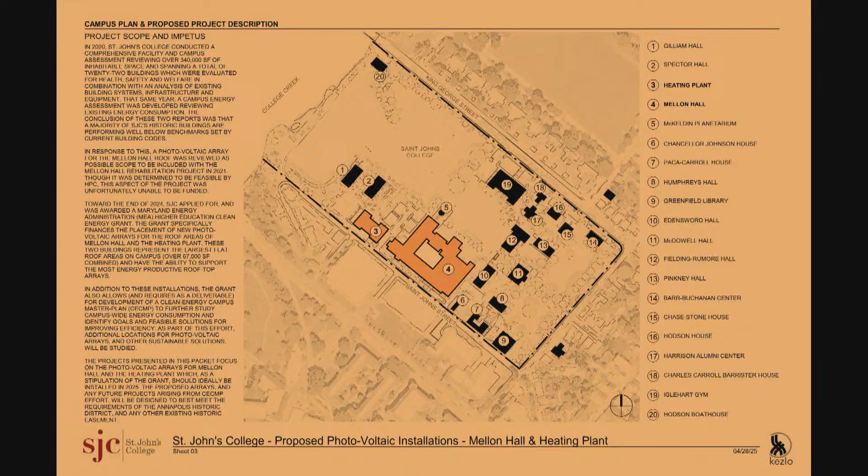Can you clarify what you meant by benchmarks? I guess it's... not as energy efficient as it should be. If you look at the requirements for buildings in new construction, there are certain energy benchmarks listed in various codes, from the IBC to the IECC. Being an existing, historic building, oftentimes those buildings fall short of those benchmarks—by nature they don't have the building envelope systems we have today.

That said, a lot of the codes allow for exceptions or have separate rules for existing buildings. Even though those are allowed to exist as they are, St. John's wanted to find ways to improve their energy impact. So what's proposed improves but doesn't meet those higher standards. So what you're presenting improves the performance but doesn't meet the current new standard. That's correct, we're trying to improve our standards.

We're trying to look at the amount of energy St. John's is using campus-wide, and find ways—part of the grant is—can we supplement what would normally be fossil fuel generated energy with something of a clean energy nature. I just wanted to be sure we understood exactly what you were referring to, but thank you.

These two buildings are within the historic district of Annapolis, but they also fall under the purview of the Maryland Historical Trust. Both buildings are on Maryland's inventory of historic properties. However, only Mellon Hall currently has a historic trust preservation easement on it, due to various projects over the years, including the rehabilitation project where state funding was sought, establishing an easement. What that means for this project is that while the heating plant and Mellon Hall are both being reviewed by the Historic Preservation Commission, only Mellon Hall also needs to seek approval through the Maryland Historical Trust's easement committee.

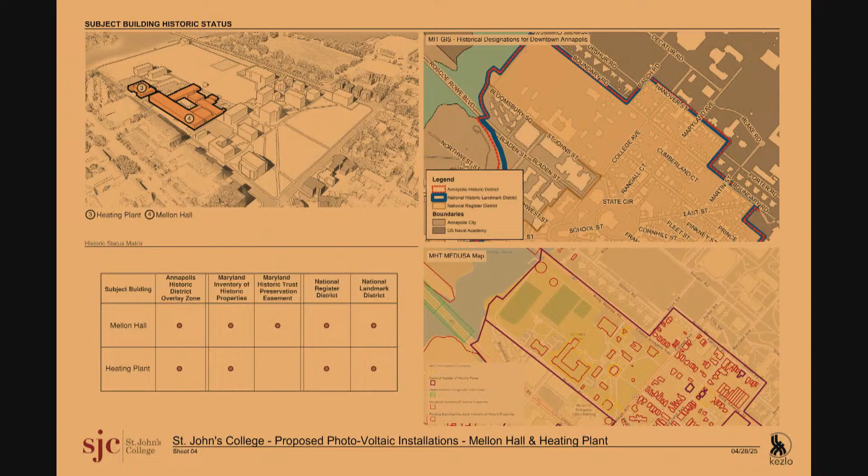Have they granted that approval? Yes, I'm happy to report we presented this back in beginning of May, and at the end of May received a letter from the director stating the project appears to be in compliance with the Secretary of Interior standards, and that the request to change or modify the easement has been approved. Okay.

These next couple of sheets again kind of summarize the various standards and guidelines that each organization utilized when reviewing regulations surrounding historic properties. They're slightly different documents, however most of them have very similar language, and indeed you'll see a lot of repeat language in here.

Would you like me to go through these? We kind of reviewed them pretty extensively during the last meeting. Have you read the staff report? Yes. Have all the commissioners read the staff report? I don't think it's necessary for you to do that. Okay, sounds good.

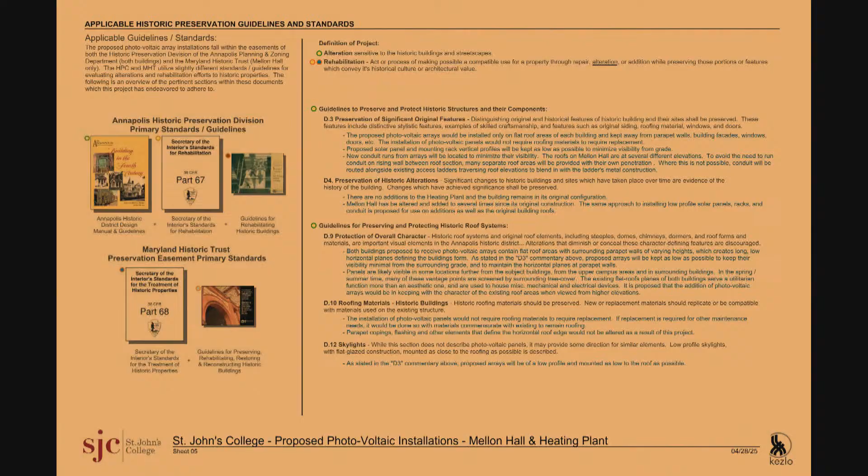Again, the brief histories of the buildings, just to touch on these again: Mellon Hall was originally constructed in the late 1950s and designed by the famous modernist architect Richard Neutra, primarily known for his work on the West Coast. I believe Mellon Hall is one of his last remaining examples of architecture on the East Coast, consisting of, if you look at that exploded view in the middle, the area in brown tan color, the FSK lobby, the conversation room, the auditorium space, back of stage areas, a two-story addition along St. John Street that's the academic wing, and then the other academic wing that projects into the campus.

Then in the late 1980s, the building was added onto by the designs of Weller, Fishback, and Bock, shown in the green portion of the exploded view. They enclosed the courtyard space and created space for administrative functions, as well as the Mitchell Gallery that projects out in front of the building.

The last additions occurred in 2001, designed by the firm Ziger/Snead, shown in blue. It consisted of the addition on the northwest along St. John Street, sometimes referred to as the conference room addition, as well as an infill of the canopy space in the courtyard to create what's now called the Fishbowl Cafe by St. John's.

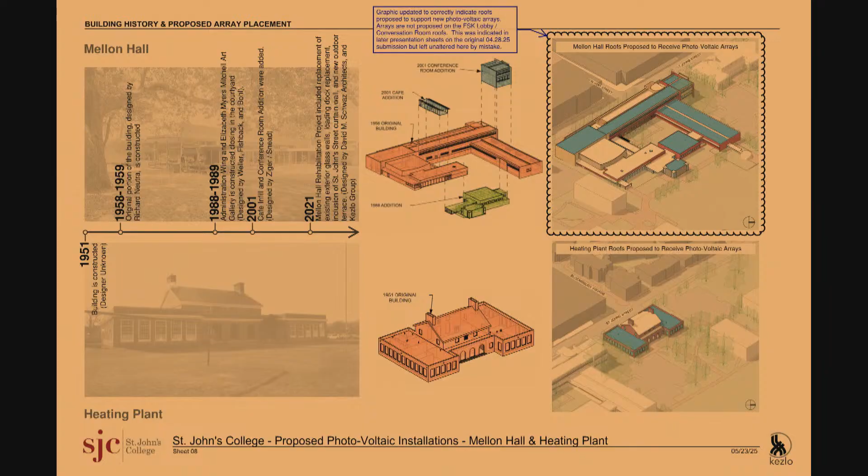Again, these are the array systems we had considered. The system on the left is the one we are proposing and requesting to be used. It is a ballasted system where the arrays are placed on racks which are weighed down to the roof with ballast blocks. This avoids the need to create penetrations through the roof for direct attachment to the structure, which introduces many opportunities for leaks to occur.

The system on the right is what we've been calling the flat panel system. You can see in the image on the left, in that gray box, all those standoffs are penetration points. You can imagine there'd be hundreds of penetrations to the roof, which introduce opportunities for leaking. Much of the roof on Mellon Hall is made out of a gypsum material, so any kind of moisture getting through that membrane becomes detrimental to the roof.

So we are proposing the system to the left. The other advantage of that system, beyond the fact that it's sloped and has better orientation to the sun for energy production, is that it allows water to drain off the panels, preventing the buildup of dust and debris, which can cause deterioration and reduce the effectiveness of the panels.

But also consider the profile height here. On the left, we notice that the maximum height of the panel is about 9 and a quarter inches. Whereas on the right, the flat panel system, due to the flashing requirement around those penetrations, ends up pushing it up to about 11 and a half inches.

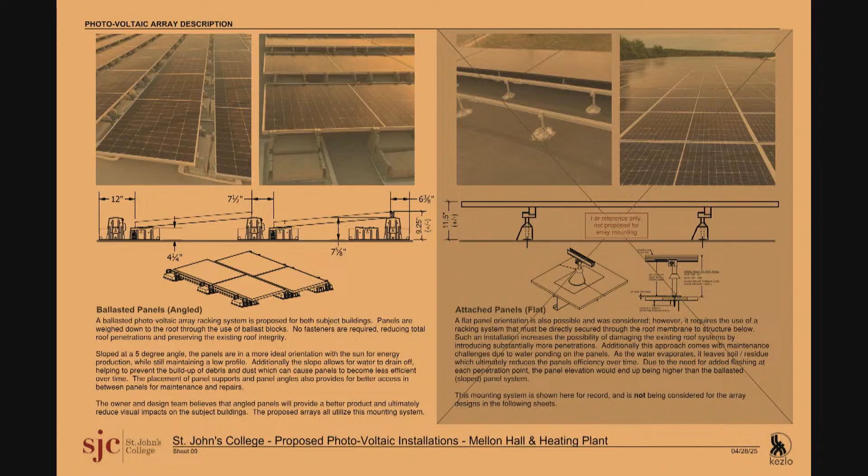This sheet covered basically all the components that were involved in the total photovoltaic system.

One thing worth noting here is that through our review of the system design and engineering, we were able to move items 4 and 5, which were originally noted as possibly needing to be outside if we couldn't find a suitable interior place. We're happy to report that those are now both going to be interior to the building.

So the only elements that will be exterior include the panels on the roof, the interconnecting conduit, the roof penetrations, and item 6, the non-fused panel, which acts as an emergency shutoff and by code is required to be on the exterior.

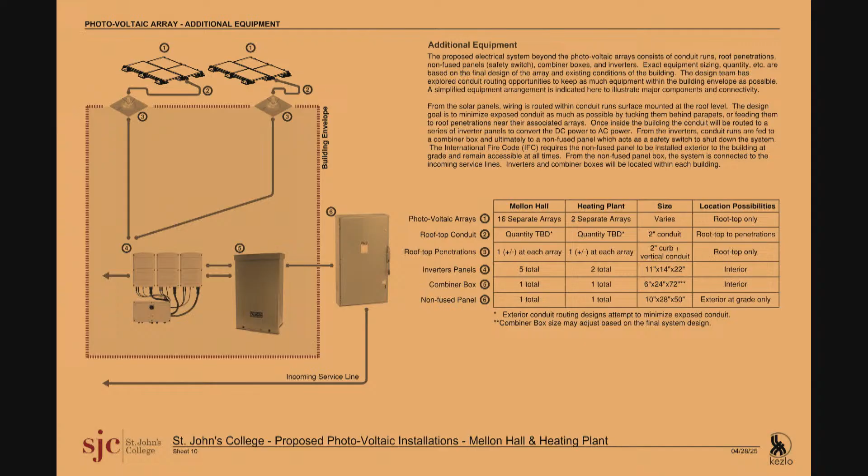This is our updated array for Mellon Hall, and I just want to give a couple of facts and figures here.

Right now we're proposing 16 separate arrays equaling about 396 panels. Annually, that's calculated to produce on average about 236 kilowatts, which is about 260,000 kilowatt hours. That's the equivalent of about 410,000 pounds of CO2 avoided through the generation of that energy, and is enough to power about 24 single-family homes per year.

It's good to know, though it's not something that can affect our decision. Just some interesting facts to put out there.

As you can see, we've taken these panels off of the roof of the lobby space and the conversation room. Again, as we're trying to respect that Neutra design, we're keeping these arrays in regular patterns, monolithically installed on the roof to the best of our ability. There's some working around existing penetrations and equipment that occurs here, but we think we've captured those monolithic arrangements to the best of our ability.

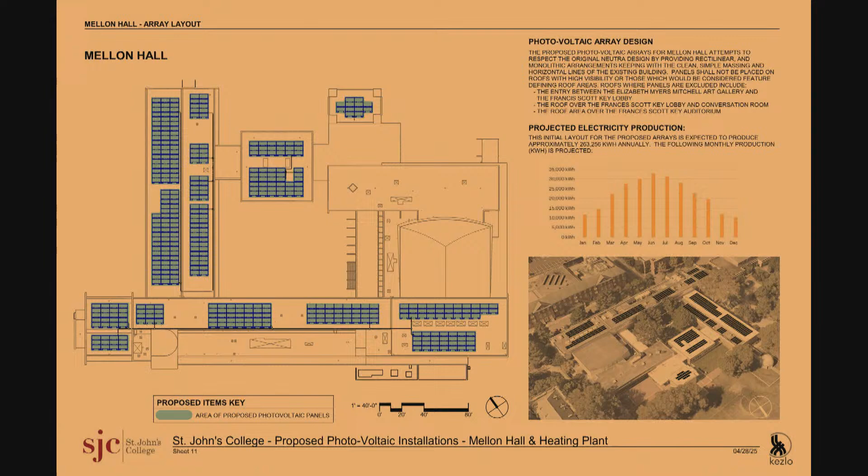These next sheets go into detail about the specific arrays on Mellon Hall, their overall sizes, and the number of panels in each array. You'll see they're interconnected with different blue lines, meaning that's where we're proposing conduit runs.

I'll get to that a little bit later, but we've also done a study to understand where we can place conduit in such a way as to keep its visibility as minimal as possible, to the same extent as we've been doing with the array panels themselves.

We've worked very hard to try to identify routes where we can penetrate the roof and drop that conduit down into the basement and around the building and down to the backside of the building where we have our inverters. That wasn't necessarily as important to this meeting, but certainly was important to the Maryland Historical Trust.

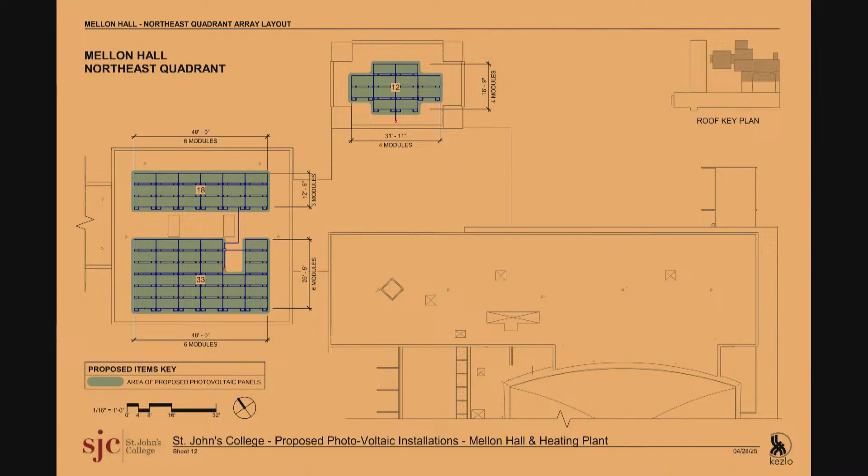So this shows various sections around the building, kind of the backstage area, going along St. John Street, then the other side. And then that single-story addition projecting out into the campus, turned sideways because we've had to put it on a sheet.

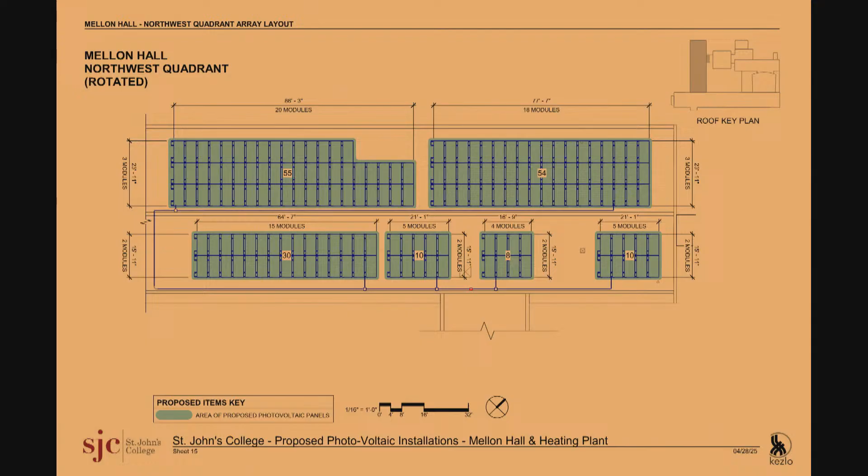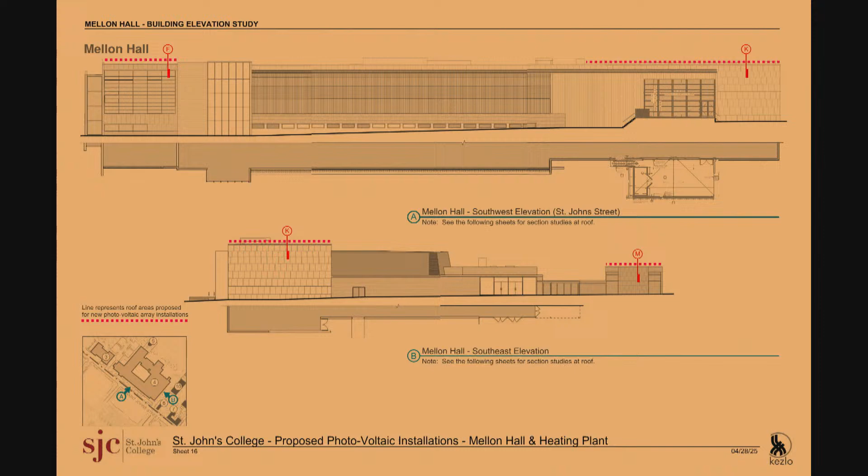These are elevational studies, again identifying which portions of the roof have array panels that are relatively close. So the first elevation across the top is along St. John Street, and then as you turn the corner, coming into the parking lot between Mellon Hall and Paca-Carroll and Campbell, which is now Edensward.

And then turning the corner again from campus, looking out onto the roof there. Again, as you'll notice, we've removed the panels from the Francis Scott Key lobby space and the conversation room. And then the last elevation is from the parking lot between the heating plant and Mellon Hall.

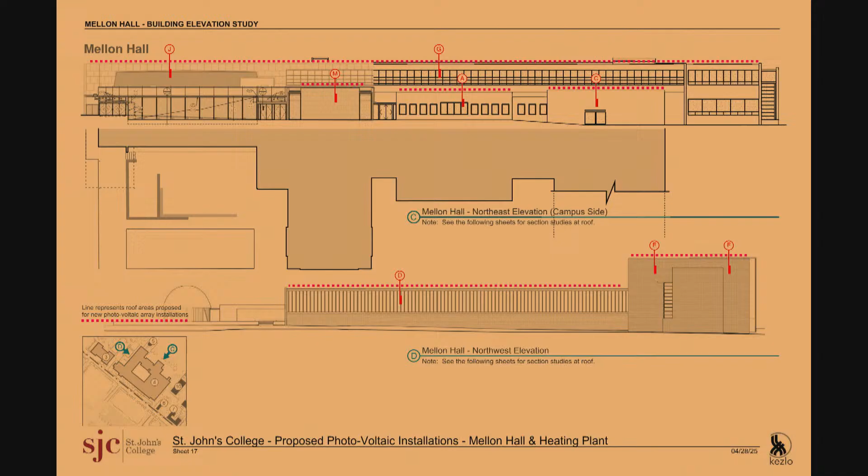This sheet was updated slightly. Obviously, the clouded area we wanted to reference is Appendix B, which is our study of the mock-up of the array, which we're happy to go over.

We went up on the roof and confirmed a lot of the measurements for these parapet heights, which were based off record documentation. Some of them got a little taller, some a little shorter. This is updated to show the existing conditions around the building.

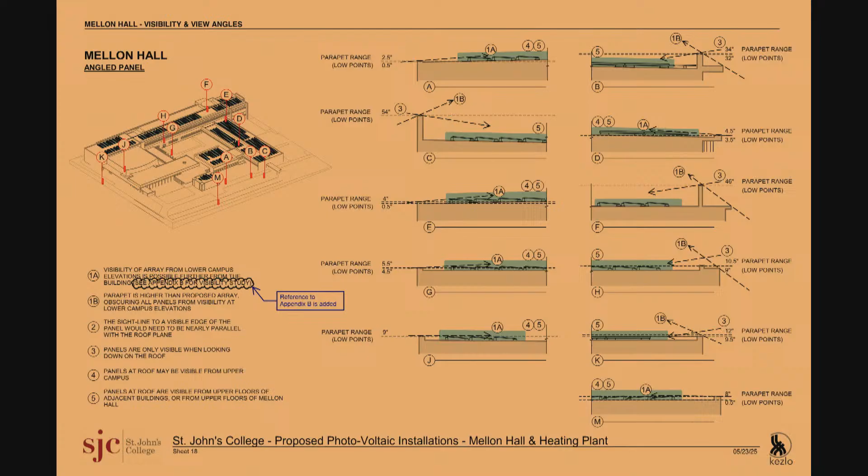Do you have any photographs of the existing temporary arrays? Yes, I have photographs of the mock-up, towards the end in Appendix B. And you're going to present those to us? Yes, sir.

Getting back to the overall photovoltaic system and where we're going to be placing the non-fused panel, again, it wants to be at Mellon Hall, located behind the electrical yard adjacent to the building, between the building and St. John Street, where they have existing electrical equipment from the switchgear to other miscellaneous components. We're proposing this to be mounted.

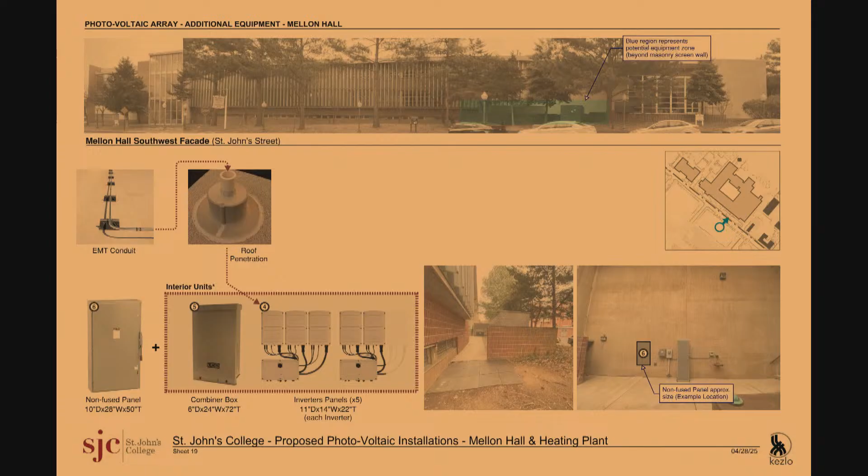This sheet talks mostly about where we want to be placing our conduit. We've done our best to keep the conduit against parapets and areas where they'll be concealed. The conduit itself is anywhere from about 1 inch to 2 inches in diameter, depending on what portion of the array we're talking about.

With the standoffs we've created that we're going to be using, they should be much lower than the arrays themselves, and many times we'll travel underneath the array. Where we can, we've penetrated the roof — Mellon Hall has lots of different elevations across the various roofs of the building, and we've tried not to traverse those as much as we can.

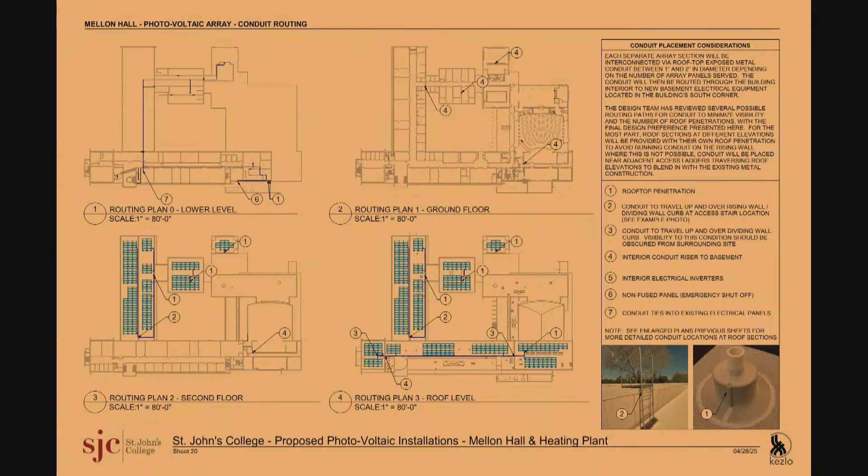So that's it for Mellon Hall. I'm happy to continue through the heating plant if you want to get through the entire presentation before questions, or do you want to pause here?

Why don't we pause here because it is becoming rather technical. Okay. Does anybody have any questions for the applicant?

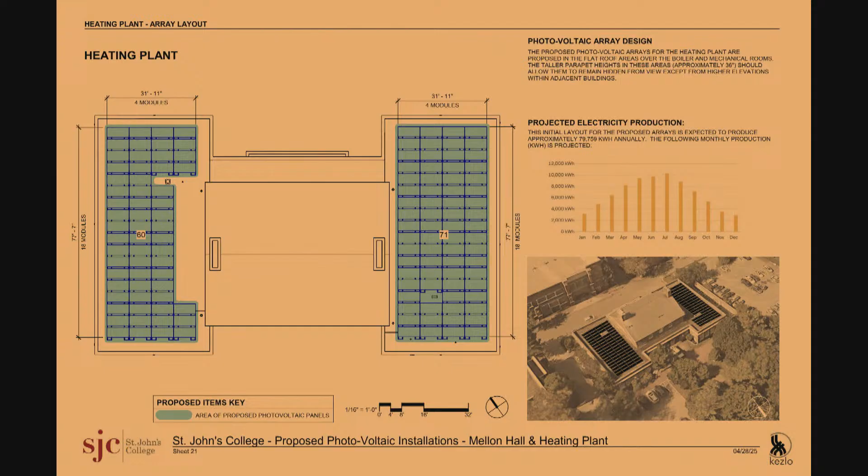This is our study going around the building, again only proposing these panels on the flat roof areas. These studies have not changed, other than that we've removed the flat panel option we were exploring at the pre-application conference.

The height of these parapet walls is substantially taller than at Mellon Hall, so there should be no opportunity to view this from grade surrounding the site, unless you get up in adjacent buildings looking down on the building itself.

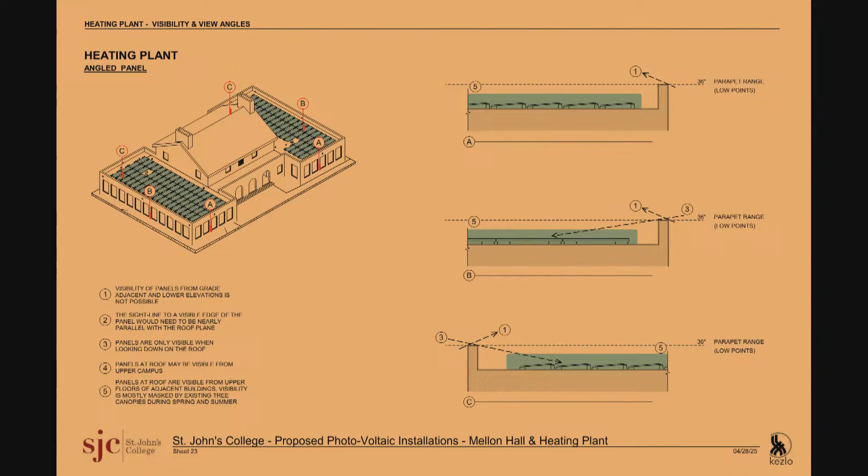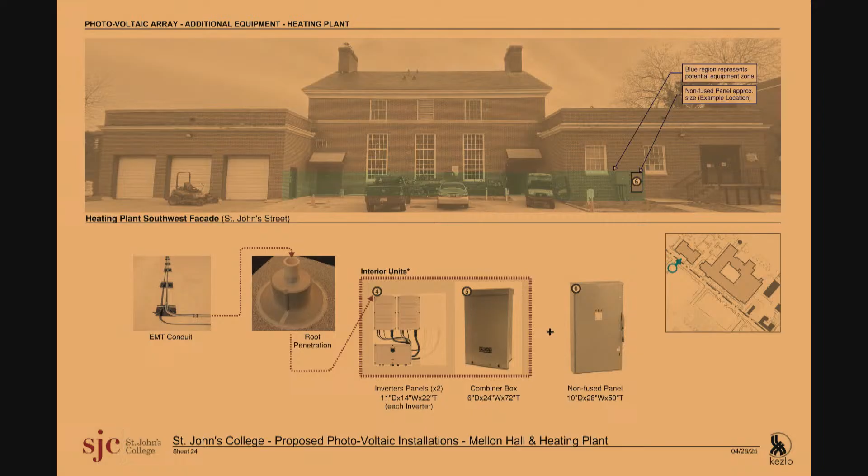But it should still be within this blue zone here. Our conduit routing for this is much simpler. We'll be penetrating from the left side of the building into the main body below the parapet, routing across that main room which contains their boilers, and then down to the inverters on the far right side of the building.

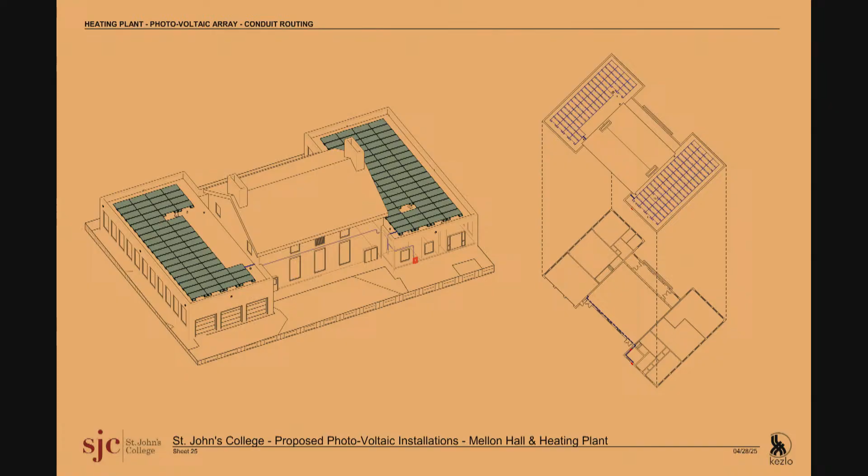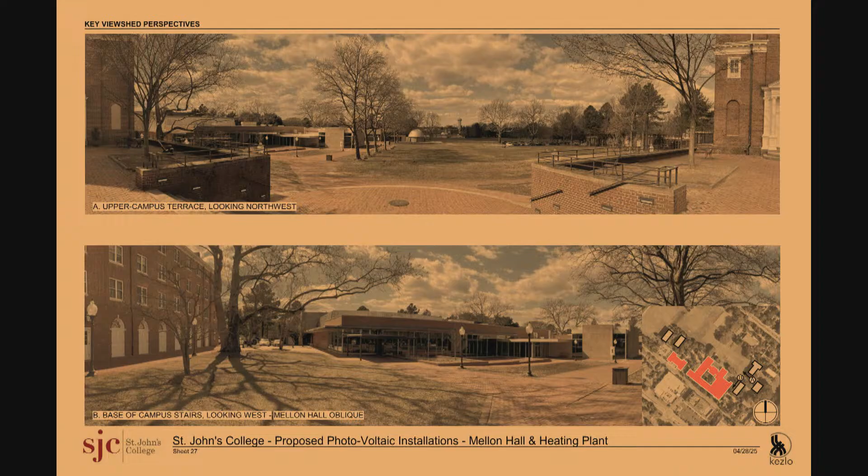This jumps into our studies — I'll just breeze through these. We tried to identify initially the view sheds that we felt were important around the building, taking photographs for context. The first image standing at that quad between McDowell, Randall and Campbell, looking down over the lower campus areas. Then coming down the campus, looking at the oblique of Mellon Hall.

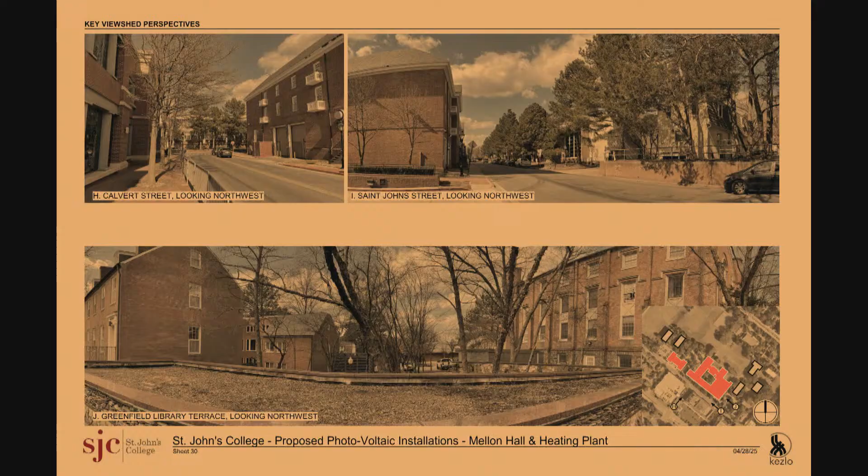And then swinging around Calvert Street, and back up St. John Street, finally ending at the Greenfield Library, looking out between Humphreys Hall and Paca-Carroll.

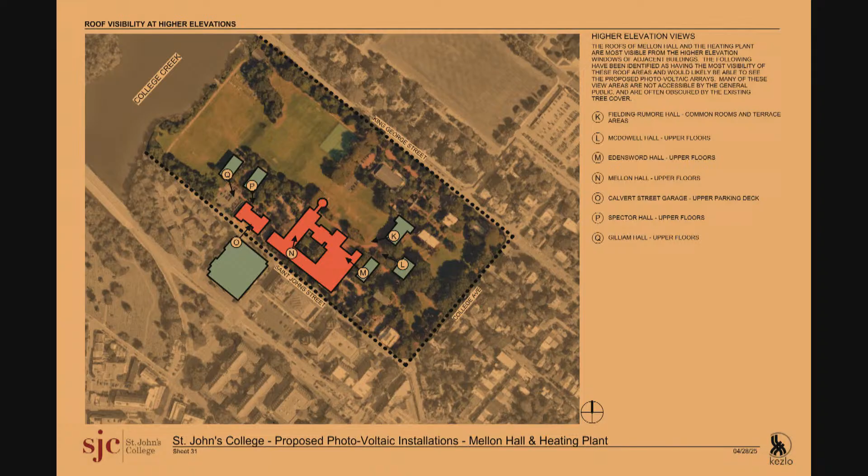Again, looking at the Fielding-Rumore, which was originally Randall Hall, at various points there. Looking at McDowell, or from McDowell Hall, at the upper floors of McDowell.

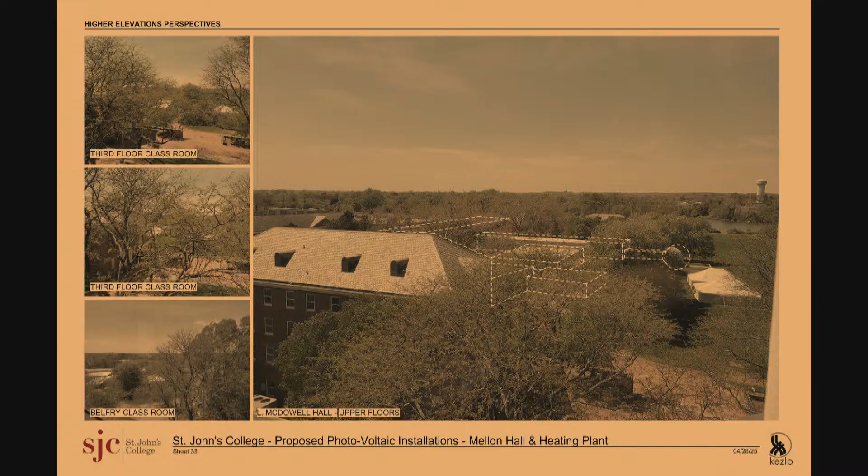At Edensword, which was Campbell Hall, the central image being from kind of on top — I think we're in a stairwell looking down — and then from grade across where the new cafe space is.

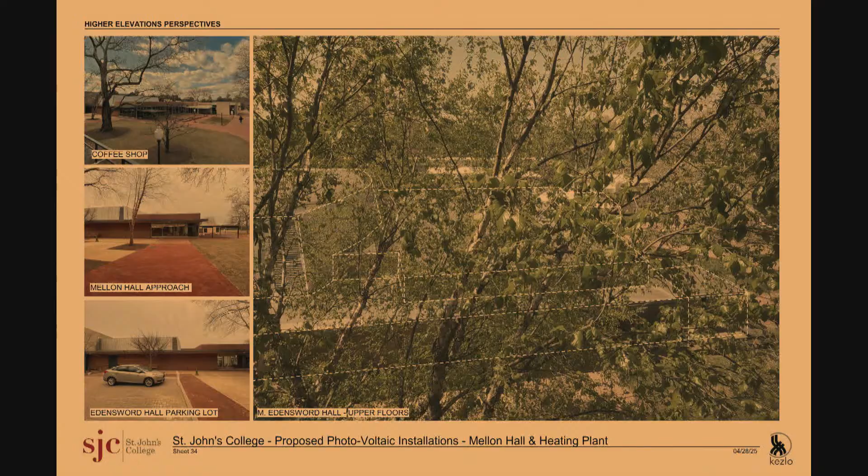Obviously, from within Mellon Hall itself, there's views of the rooftop, and then standing on the parking garage from across the street, trying to identify what was visible there. And then lastly, standing in Spector and Gilliam Hall.

The parking garage is the only truly public building that overlooks these areas — the only one I believe the public can get into and look down from.

It's public, but you've got to go through security. So you don't just walk around.

I was trying to narrow it down. That was our finding as well — when we get on top of the parking garage, there was this large area, and I had to stand up there with my hands above to take some photographs. No, not like people are wondering, you know.

I did want to note that the combined predicted energy that will be generated from these panels should account for about 5.7% of the total St. John's College campus energy use.

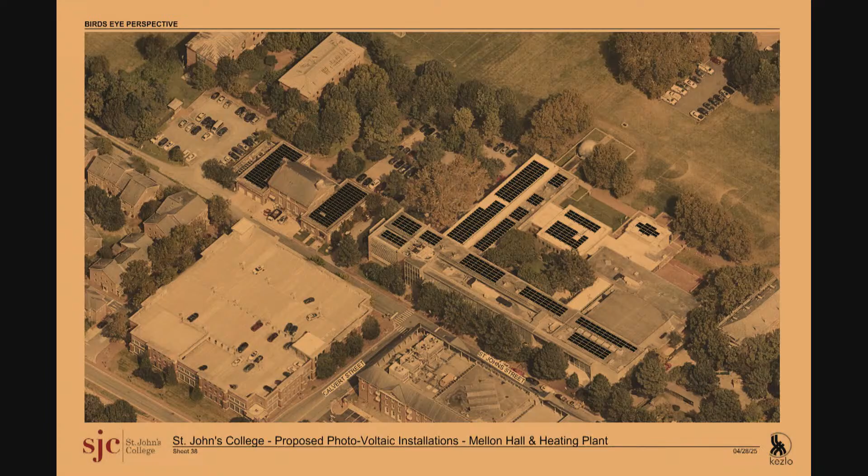Does that conclude your presentation? Well, nope — I've got Appendix A real quick, just going through the product information of all the exposed components.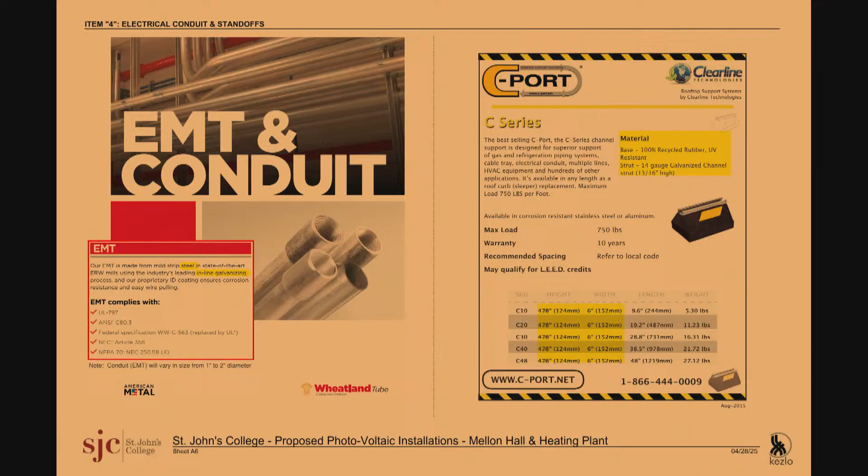You don't really need to do that for us. Okay. Did you want to go over the photographs for the mock-up? Yes. Yeah, okay, please. So that's what I was going to get to, this is Appendix B here.

So as was mentioned, we installed a mock-up of the array panels on top of Mellon Hall, which we felt was where the array would have the most potential for visibility.

A lot of the interns helping with this, who are here today, helped actually place these on the roof.

They represent, they're close to the height — the height of the array is actually 9.25 inches. Total, this pushes up to about 10.5 inches, so it's a little bit taller. But we were able to get them positioned at the high points of where the array would be.

If you can imagine all these arrays being sloped, we placed them and strung a neon string between all of them.

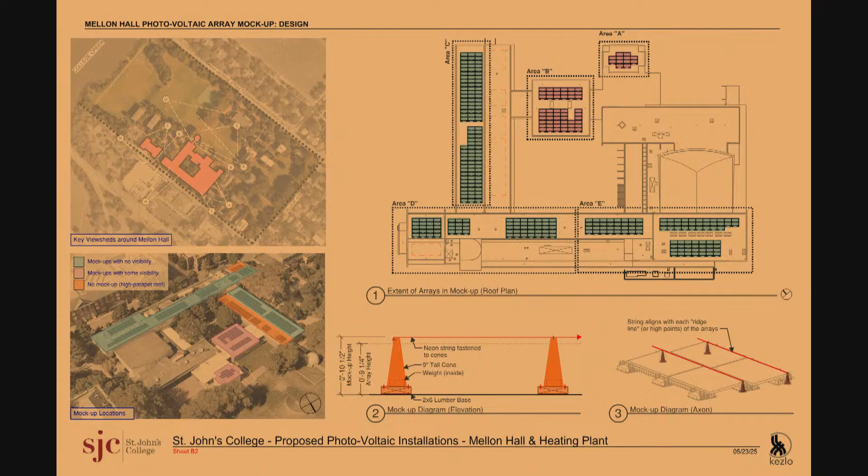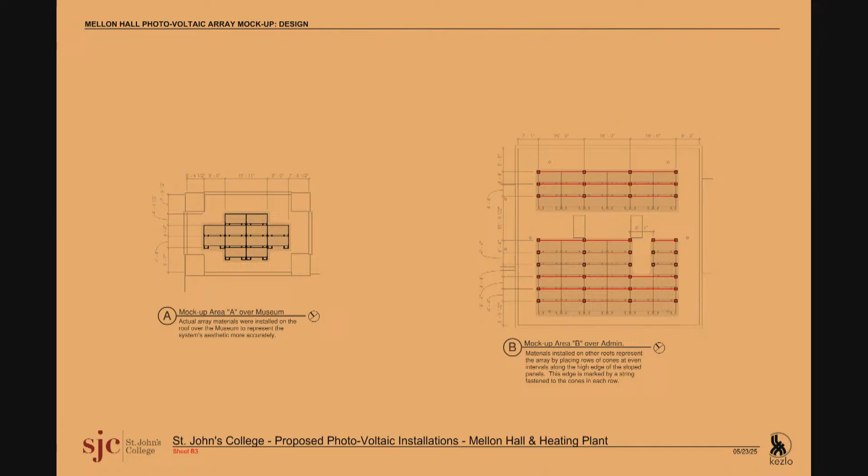And like I said, we took two approaches here. Most of the array mock-up used these cones, shown in Image B. In Image A, over top of the art gallery, we actually installed the actual panels that would be utilized in this installation for that small section of array, so it could be seen in context with the existing building.

And so these are some photographs taken from different vantage points from on top of the roof, so you can see how all that played out.

Those are very helpful, thank you. Absolutely.

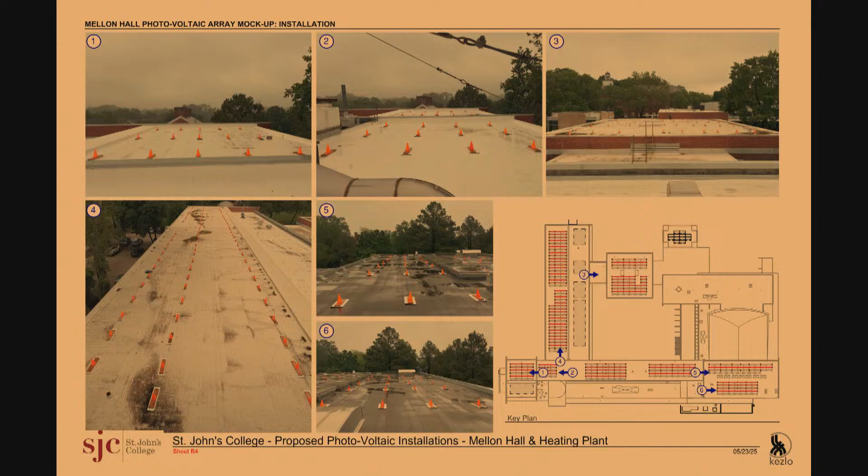And then we ourselves walked around the building and conducted our own visibility review of what was occurring. The zones in orange are the only areas where we found that portions of the array were visible. They were only visible on top of the art gallery, and a little bit more was visible on top of that square administrative section.

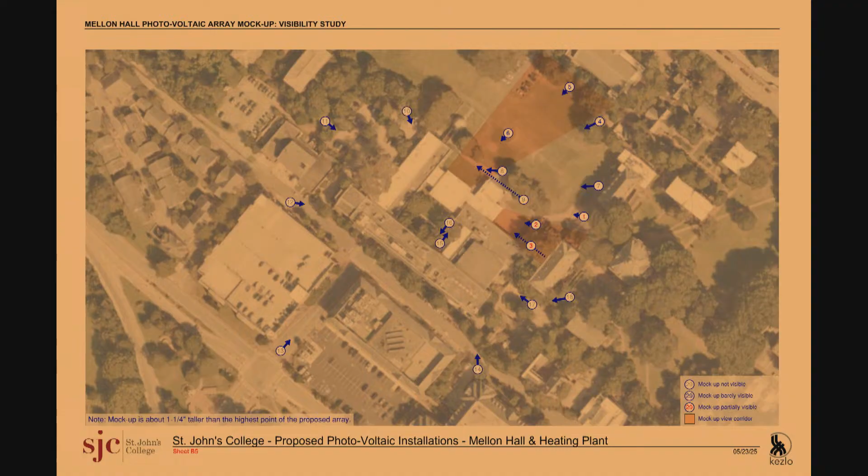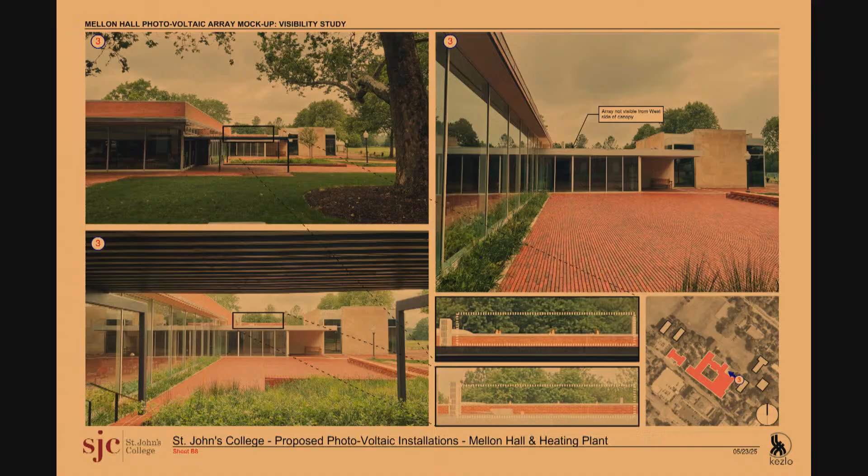Standing across the field over by the Iglehart Gym, again the arrays become visible as you stand further out. As you get closer and closer towards the planetarium, they begin to become less and less visible, the closer you get to the building.